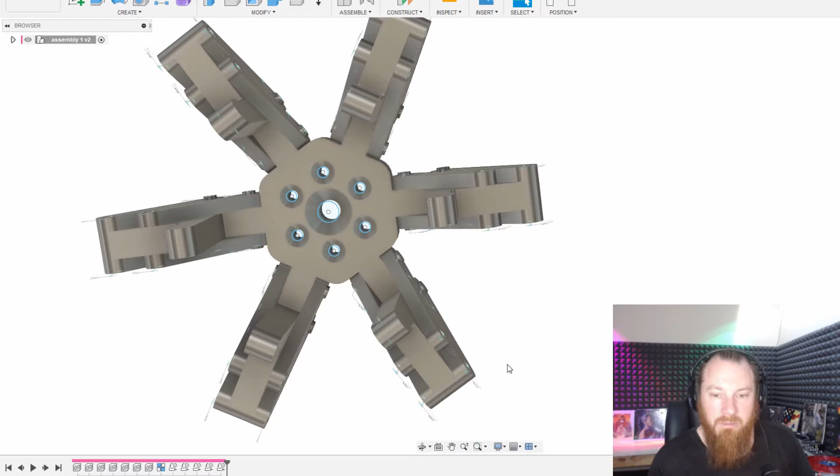I'll just turn off this motion study. So this is an assembly of a 6-jaw robot end effector, or like a 6-finger gripper. As you can see on the timeline here, we've only got about 12 or so features making up this assembly, which is ideal for optimizing the computer. Once you start creating large assemblies, the computer can really start to chug.

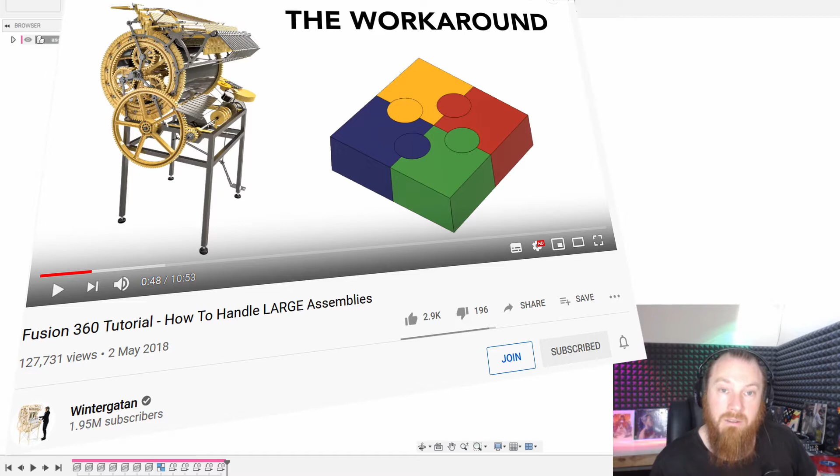I'll put some links in the description, but Wintergatan with his Marble Machine X has done a really good video that I watched before doing this one, showing how to do sub-assemblies, and there's some great tips in there that I learnt from him. I don't want to rehash everything, this is a much different model, so at least that's different.

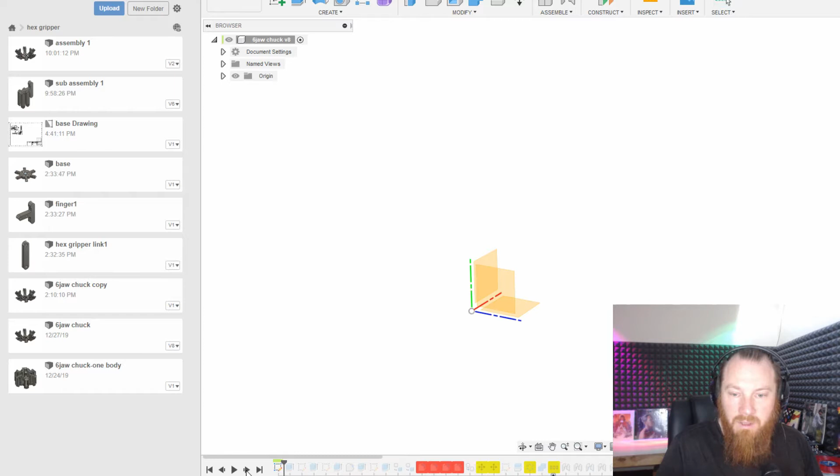If you look at where I'm at with this one, most models you'll start off with sketches, and from there you can loft or revolve, or normally would probably be extrude, and that's what we're doing in this case. So a couple of sketches, extrude, and the fillets, and there we go.

So at about this point here we should be converting this body, or probably all the bodies, once we've got the fillets and things that we want, and convert them to components. So we'll convert this to a component, create a component from body as an example. So we've got this component here.

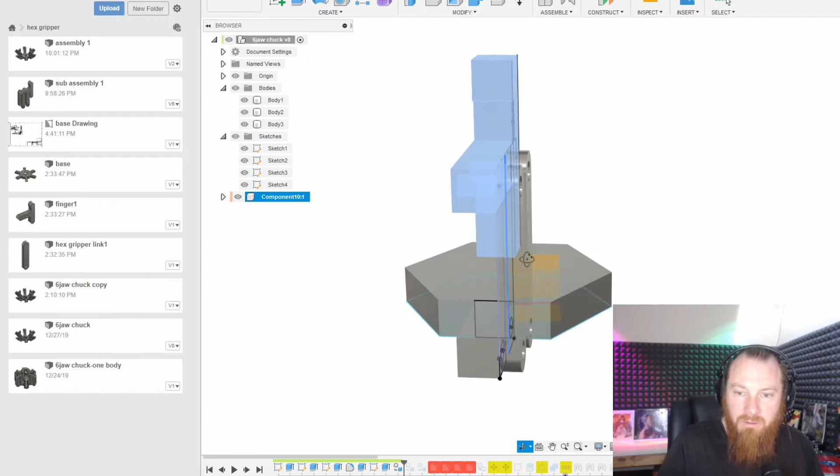Now what we can do is, once we've got our sub-assembly, which for this one I basically created the finger and 4 of these parallelogram little arms, letting it move. I'll show that in a minute, but you want to get each one of these components out into its own design.

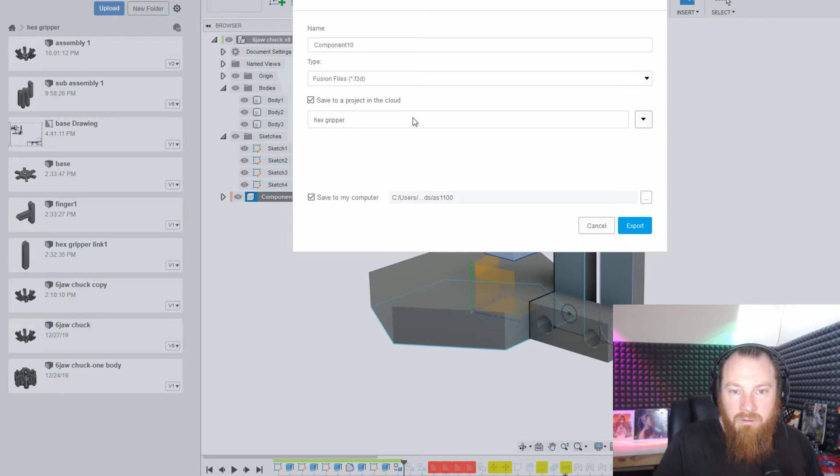So we'll export that and save it to this project. I could start a new project, so I'll use this one.

To get to that point you have to make sure you've got your component how you want it, so the timeline does not come across with that once you put your component in there. However, you can update your component in that file and then put it into the sub-assembly, and that will carry over. Component 10.

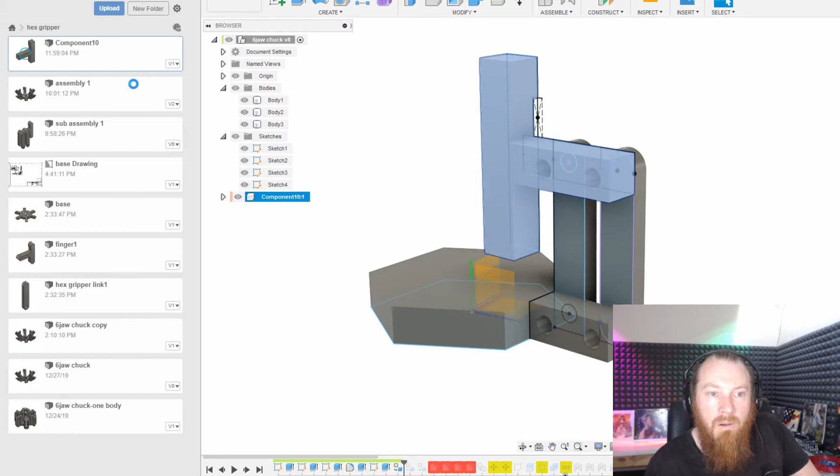Let's have a look at that. Alright, there it is. So it's just exactly how it was.

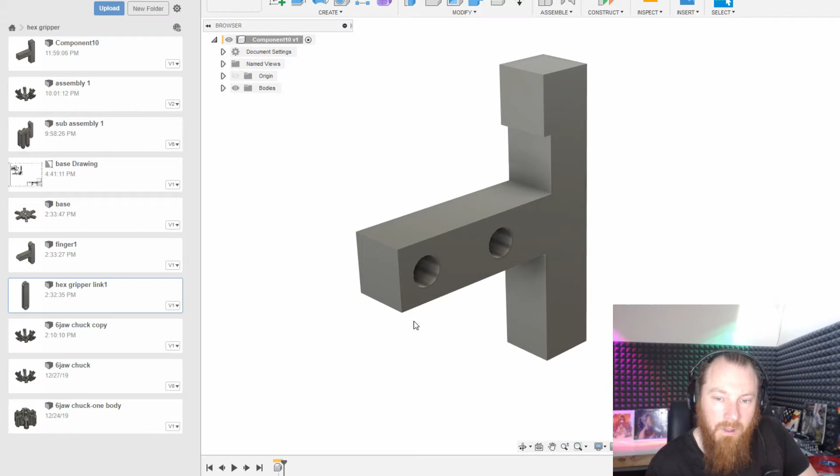Now basically you'd bring across all your other components into, you just add them into a sub-assembly. So for example, I've got one here, I can add this, insert into current design. And that's another point to show here, is that it actually comes in the same relative position to the origin and the other components as where it was from the design that you made it in.

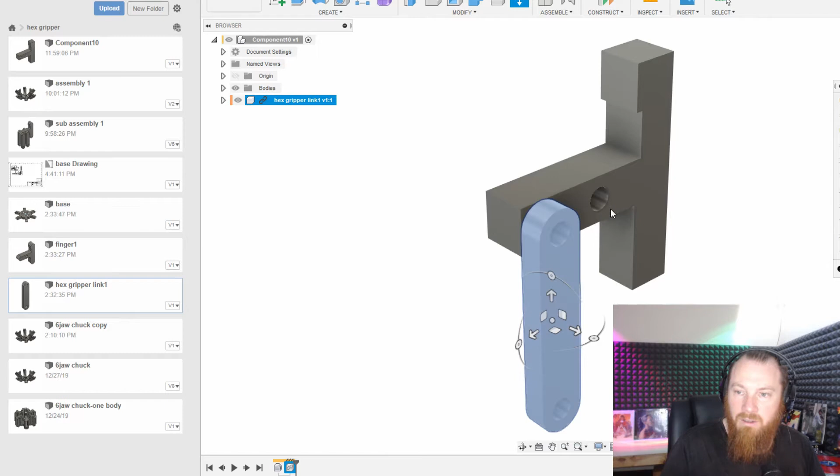But that's okay, you don't have to keep it there, and actually we'll just cancel that off, and I'll show that in this sub-assembly here that I've made.

So for this sub-assembly we've just got one of the fingers, and then when I've brought in all the sub-assemblies into the main assembly, I've offset them each one by 60, then 120 degrees, and 180 degrees, so they've filled up all the angles of 60 degrees, the 6 different fingers on the main base there.

Okay, so I'm going to try and go through this fairly quickly. It might be a bit over your head if you're new to Fusion, but we'll carry on.

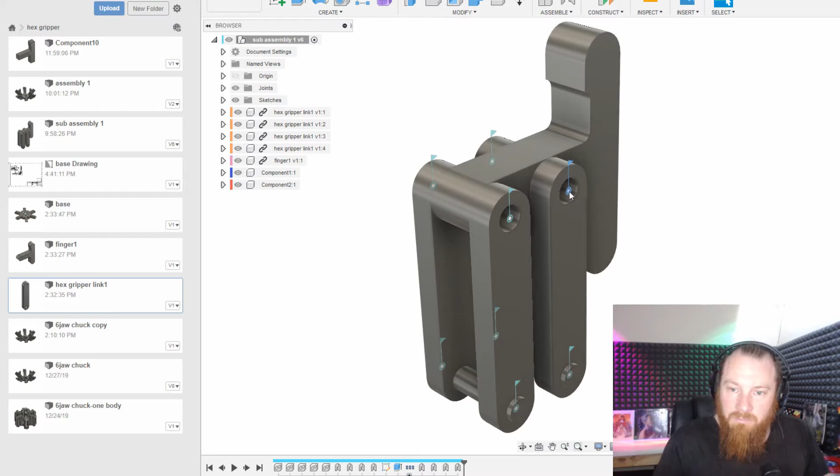So adding the joints here, I'll put some more links in the description to some good videos for doing joints and other useful resources, kind of like a compilation of a few different things in one. It's just, I think it'd be a bit too long and boring to really cover off in detail each individual thing, but...

I'll sort of take it for granted that you understand joints. Anyway, so I've added the top 4 joints there, and then the bottom 4, I'll just take a couple of steps back here so you can see. Now what I've actually had to do here is, I'll go back a couple more.

You can see I've added pins for this bottom hinge, and the reason is that I can't do joints here without having some component to use as a base. I want to do joints now so that when I copy all these sub-assemblies into the main assembly, all the joints are ready to go. You'll see more in a minute why that's the case.

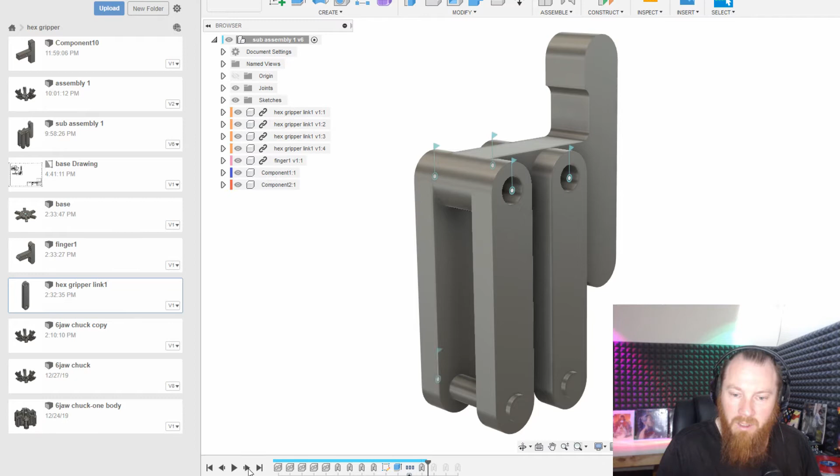So I've gone ahead and done that, and I've got my joints there. Now, the other thing I'll mention is you need to limit the joint's movement in the sub-assembly. When the joint goes across to the main assembly, for some reason you can't adjust the joint's limit of movement there. It's just some weird thing, but in the sub-assembly you can adjust it, and then it'll carry over. I'll show you now.

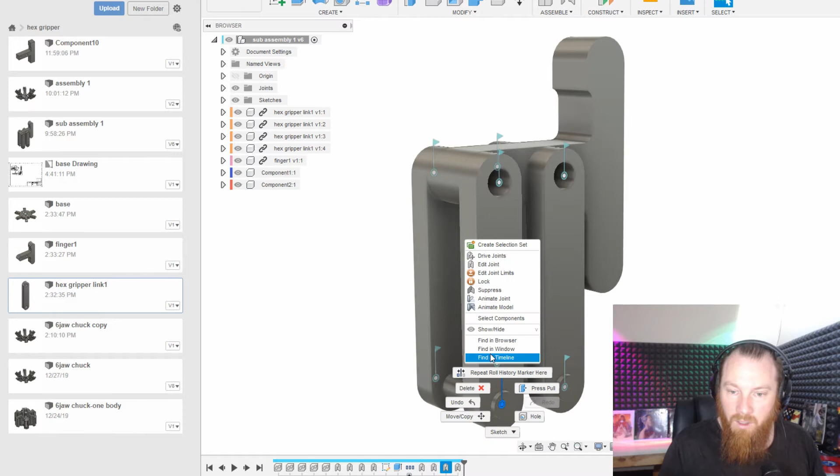Edit joint limits. I believe this was the joint I was editing. Yep, so we'll take that to 45, say OK, and I think you have to save for it to update properly. Now, if we go to our assembly, close this off.

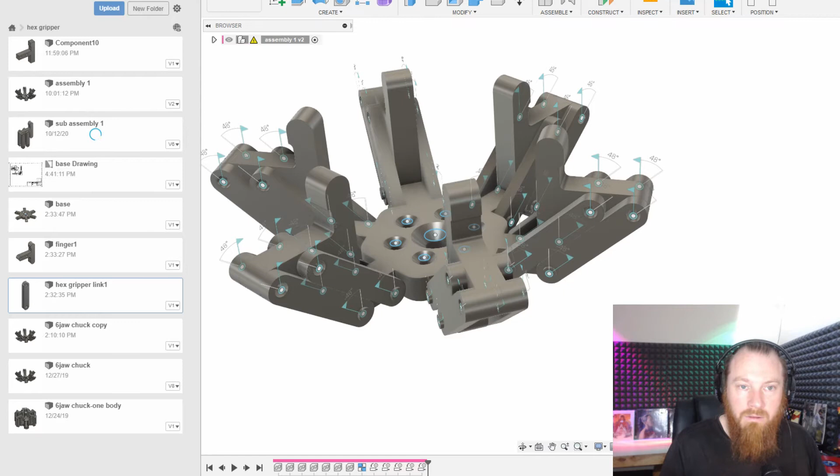Now you should be able to see that these need updating. So in the tree here you can see all these exclamation marks. There's only one assembly that's changed, so that's only going to update one thing, but get all latest, that'll fix it all.

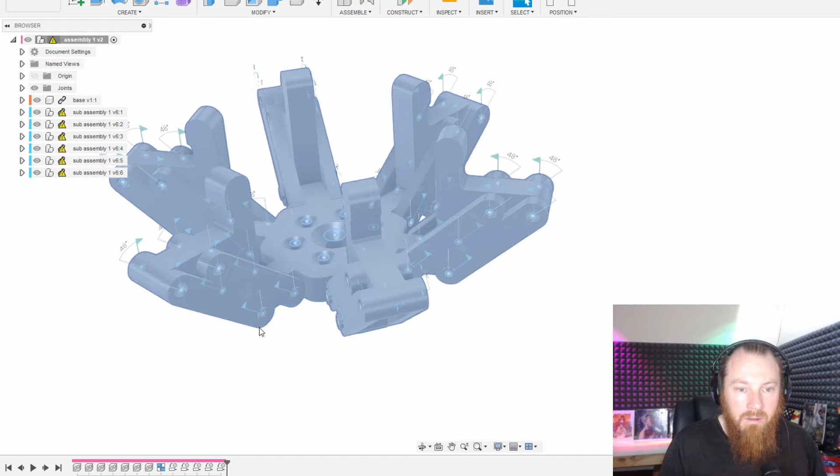And they should all switch over to 45 degrees. Yep, so now they're all 45. And yeah, so that change has come through.

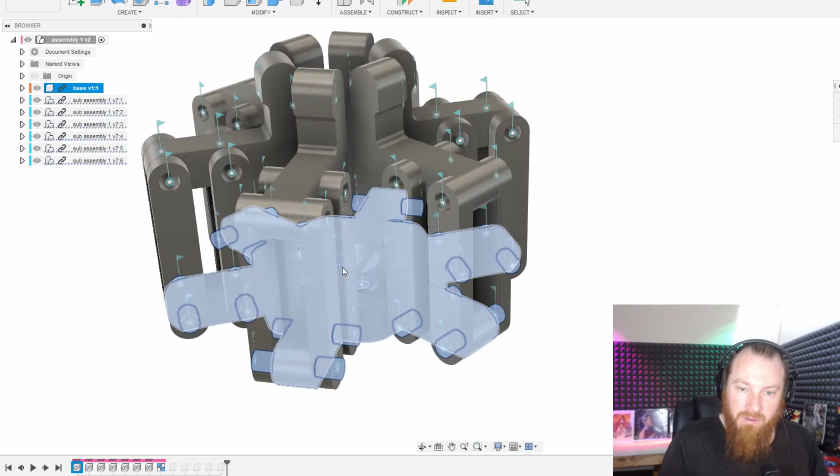The other thing to mention here is this feature - I've made a rigid body. This is what I was talking about back before in the sub-assembly. So I extruded out those pins and made components so that I could join the base of those sub-assemblies to this main assembly - I guess you call it the main base, whatever you want to refer to that as.

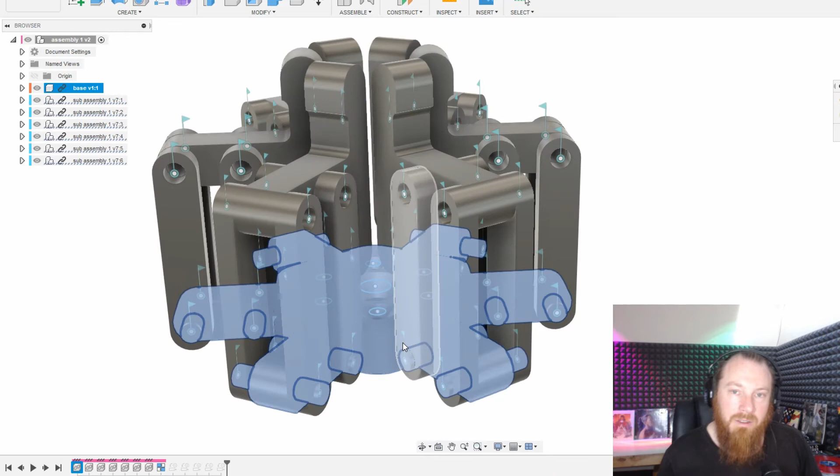Yeah, that allowed me to basically make the main assembly, and still have those joints come through. So this feature is 1, 2, 3, 4, 5 - each one of these joins the link that joins the joint from one finger to the next.

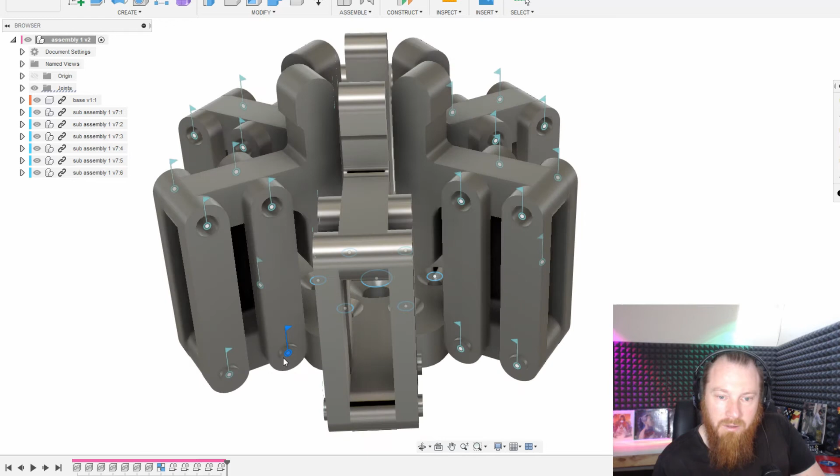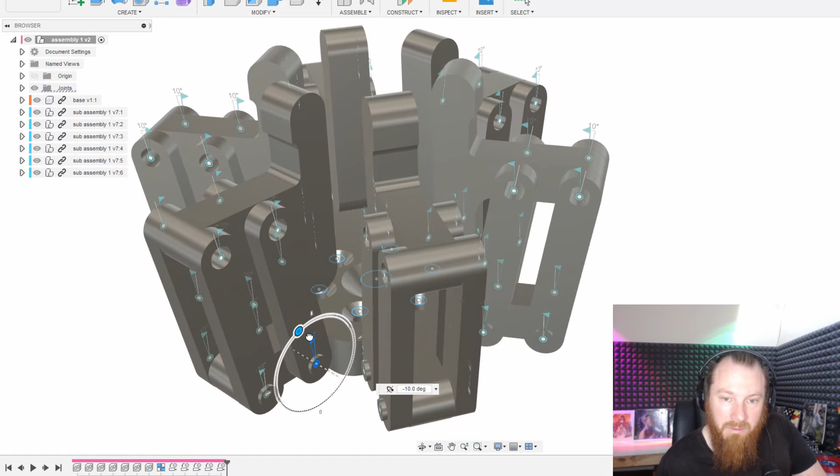So this is going from the joint in finger 5 to finger 6, and the point of that is so that when you move one of the joints, it's not too bad, it's pretty smooth. Yeah, they all move - that's what we're looking for in this model. That's not necessarily what you might have in the end device, but just as an example here, I thought it'd be pretty cool to make all the fingers move together. And yeah, so there you go.

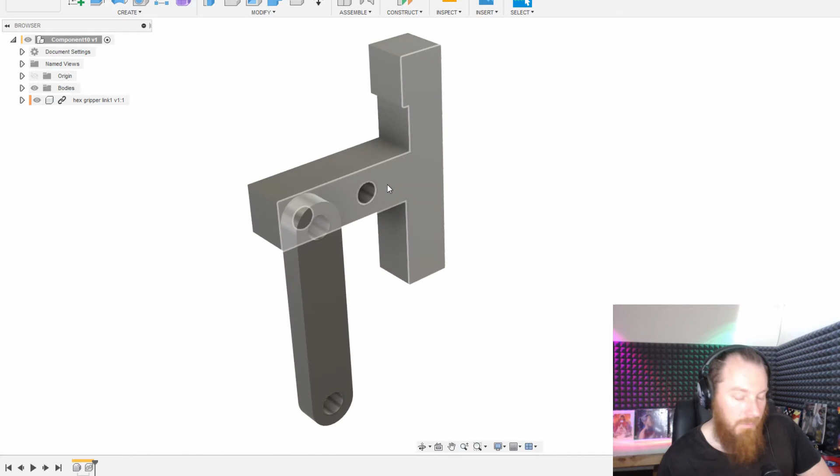So that's assemblies and sub-assemblies. I've sort of skipped through that pretty quickly. Now what we'll do here is I'm just going to quickly talk about the AS1100 drawings. So I want to say thanks to Aaron from the DCT channel - he was pretty helpful in giving me some guidance. I did a bit of research, and he pointed me in the right direction as well.

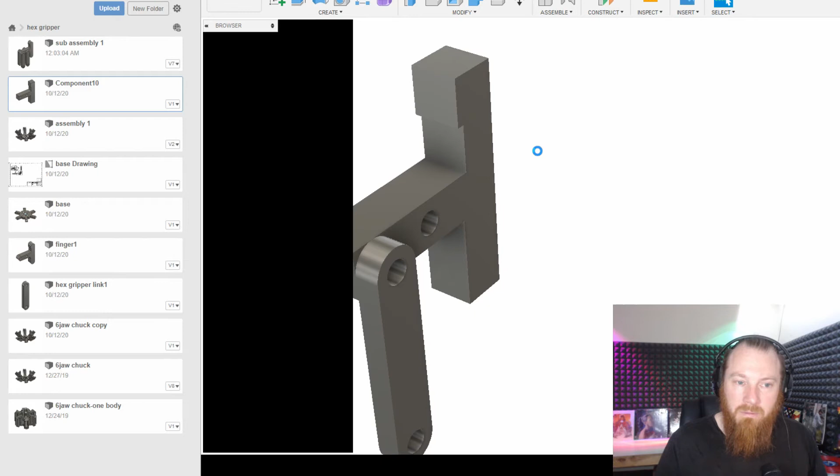So thanks, Aaron. The nicest way that I've found to do this is you have your component in the data panel here, and then new drawing from design. This will lead me to my next point about getting the component in the orientation that you want it to be in for the drawing. Yeah, see how this is, it's a bit skew.

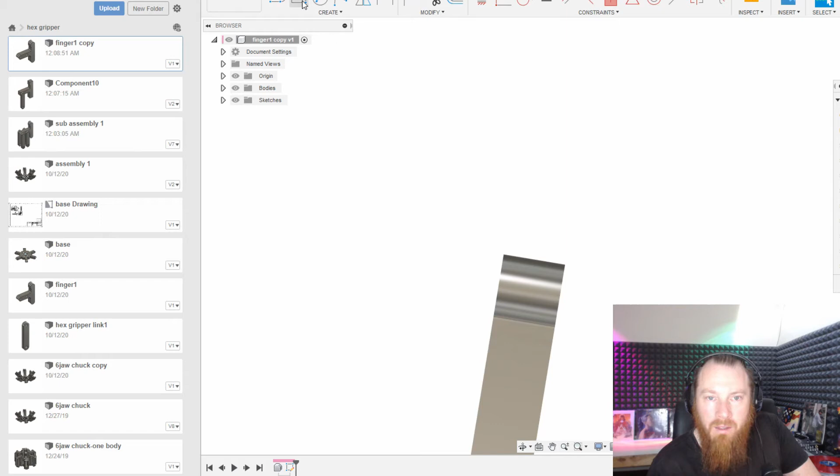Just cancel that. Right, so what I want to do here is turn the origin on, do a sketch, and just create a square on the origin. Doesn't matter, basically we just want a flat surface to align our body to there, and then we can get it in the orientation we want.

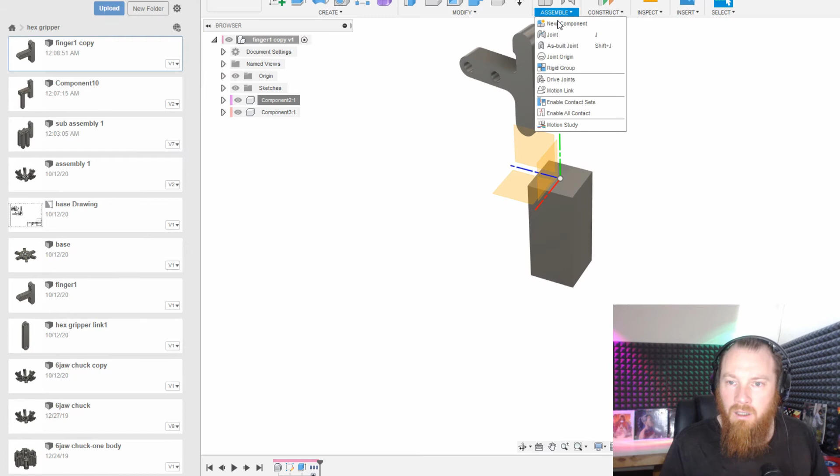Joint. This definitely gets it into the position you want - I guess that's the main point. Nope, try again. Okay, close enough.

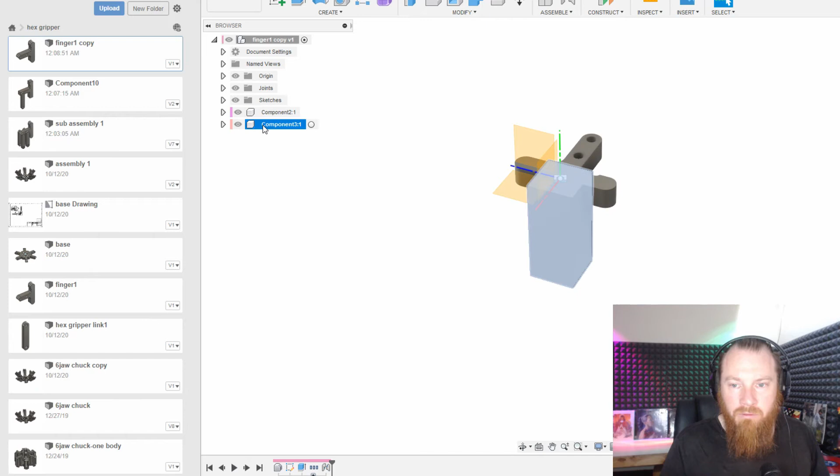Now remove this body. And remove and delete do different things, just depends what you want. I think delete actually affects the timeline more, whereas remove allows you to retain the things that were affected by it in the timeline, but still removes the body from the file, or the component.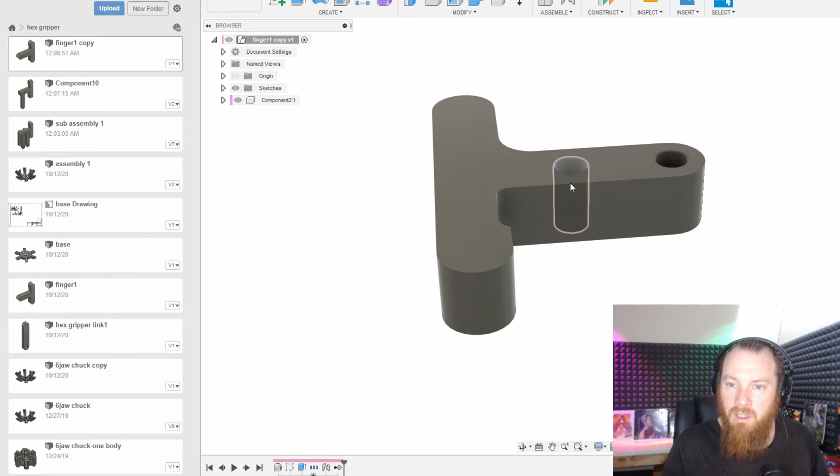Now, if we save that - I know this is a bit long-winded, but it is sort of significant to doing drawings. It's the less exciting, more professional skills. So what do we got? Insert new drawing. Now regarding the AS1100, alright, so yeah, another tip courtesy of Aaron was change standard to ISO.

Units, I mean that's probably going to be millimeters for me. So we can override, we want...

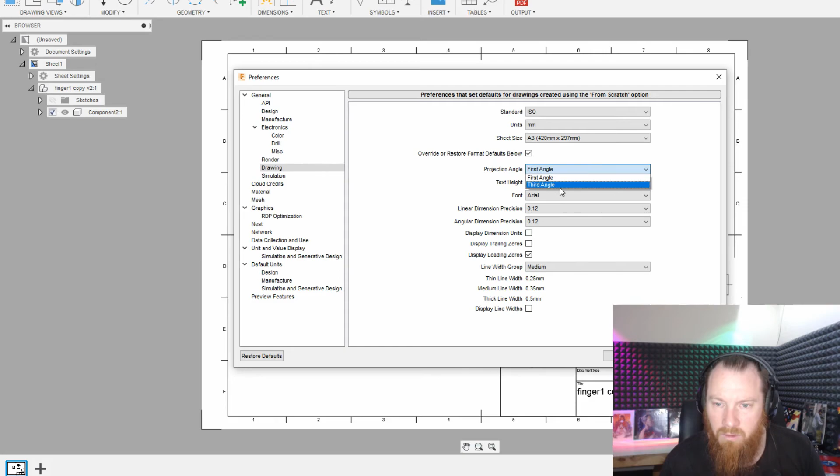Third angle, that's important. Alright, in this quick example here, we've got the right side and the top view, or projection, and now I'm going to do a projected view of the front.

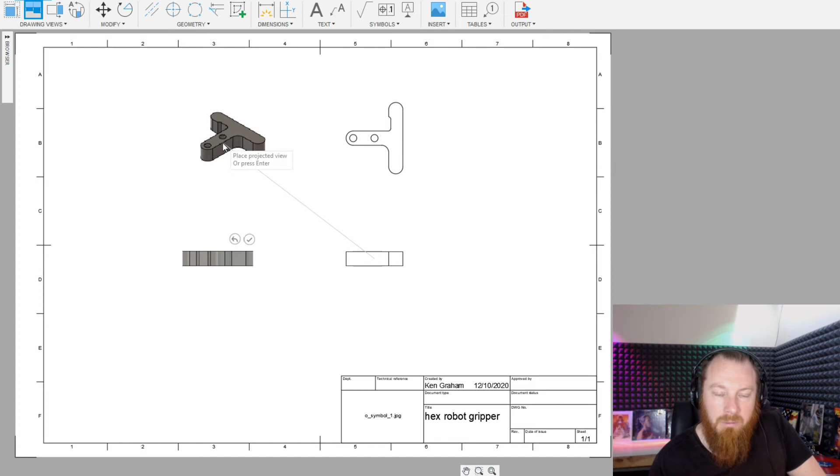And then if you wanted to, depending on the client and the usage of the document, you could add an extra view there. I believe that's technically not AS1100, but in my opinion that would be pretty useful, to have that more three-dimensional perspective. Anyway, I'll leave that there for now.

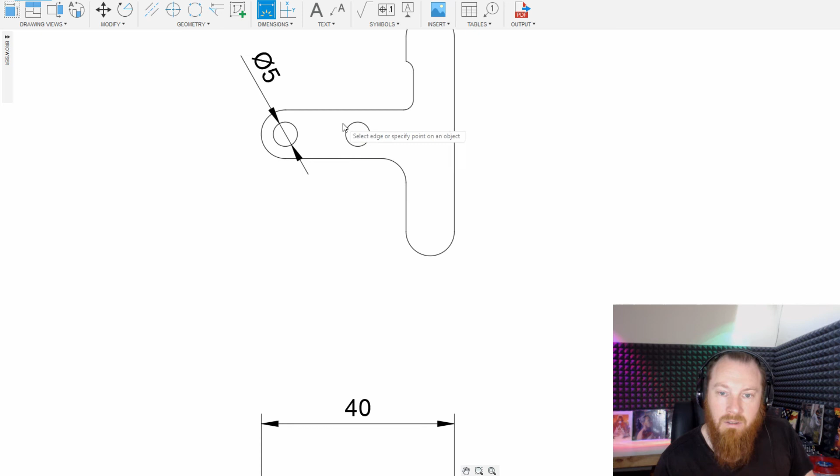And then symbols and dimensions. So obviously you want to add dimensions so you can see what's going on, and that's quite nice and easy to do. Just keep clicking on things that you need to add. So anyway, that's a quick example.

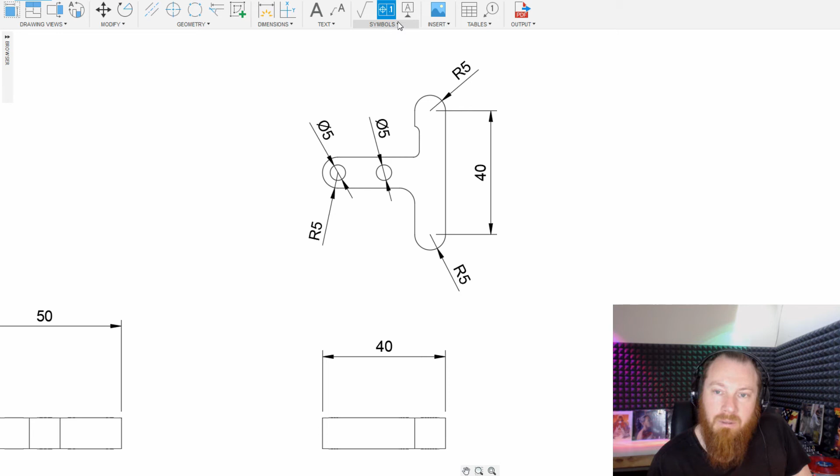And then of course we've got symbols, so datum and feature controls. I won't go into that for now, but to add tolerances and things, that's obviously a lot more detail, and maybe we'll get into that in a future video.

So the other thing that you need, AS1100, you'd put that somewhere in the table down here, and this is all nice and easy to edit. Just type things in here. So yeah, there you go, that's your drawings.

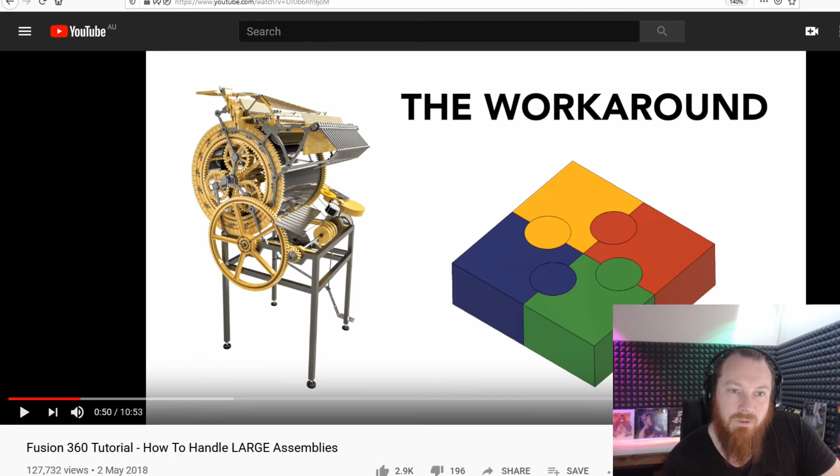When I was looking for resources for the topics covered in this video, I found a few good ones here that I'll share. So this is the Wintergatan Assemblies. He's got a good tutorial, so I'll put a link for that one in there. That's actually really nicely done. It's a simple example, but he really explains it nicely.

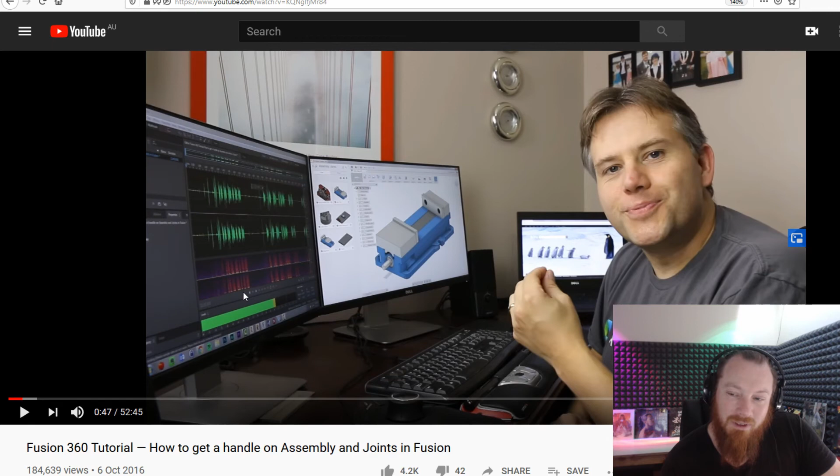And Lars Christensen has a good video here. This one was quite helpful as well, so I'll put a link for that. It's quite a long video actually, but it really it's good. Yeah, I watched it all the way through and it's good.

And of course NYC CNC has a lot of Fusion 360 tutorials, and this one on joints I found was quite useful as well, so I'll put a link for that.

Then I just sort of found this small page here, and this is a nice little introduction to the AS1100 third angle orthogonal projection. What is third angle orthogonal drawing? It's got a little video there as well, and a hand done sketch.

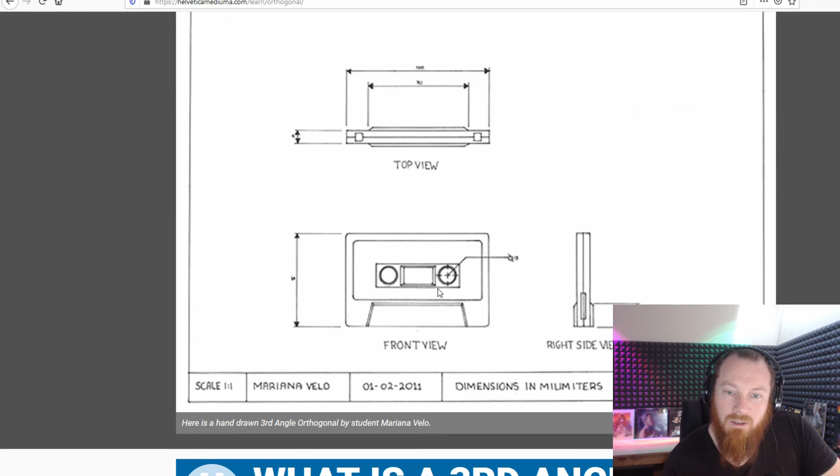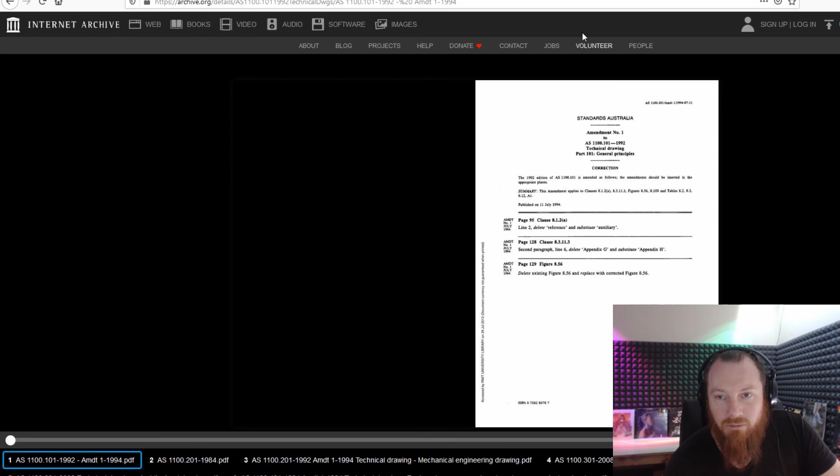And I'm not sure about copyright with this one, but archive.org has actually got a copy of the AS1100 on here. It's a bit of a weird thing that the standards are actually a book. I mean, I guess someone has to write it, and there is a copyright issue there, so that's fair enough. But yeah, you actually have to pay to get that.

And so then Aaron suggested buying this engineering drawing handbook, so I'll put a link to this one.

Final topic I want to cover in this video is welding in Fusion 360 and in drawings. I don't have a whole bunch to say about it really, other than check out this thread on the Autodesk forum, and I found there's a lot of images on here and useful information.

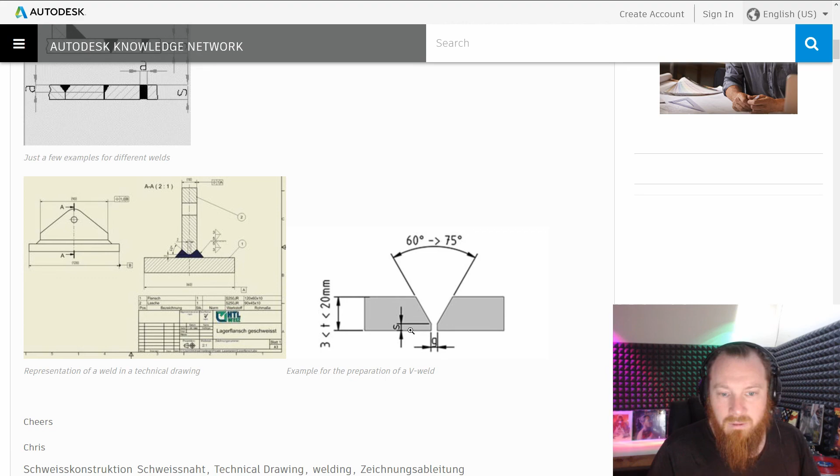Basically the takeaway for this is have the parts that are going to the material that's going to be welded together should be separate bodies, and then the welds should be separate bodies, and then in the drawings have the welds and the way the welds are post-treated all documented in the drawings. It's basically as simple as that.